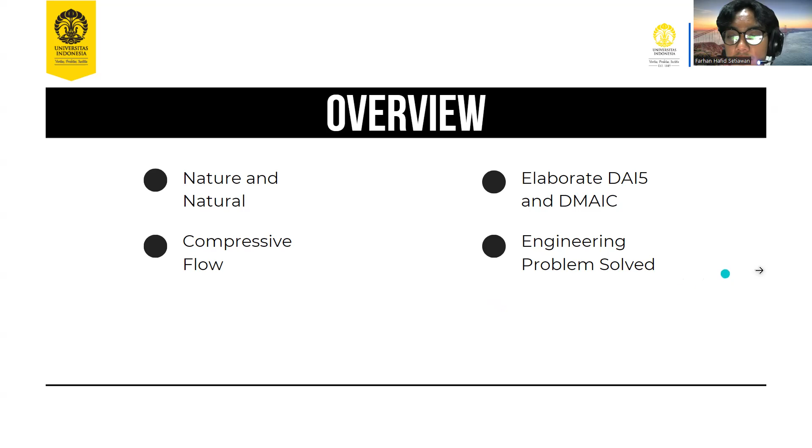First let's talk about nature and natural. What's the difference between these two? First, based on fluid mechanics, what is nature and natural? Nature in fluid dynamics refers to the laws and processes that govern the behavior of fluids. It encompasses the study of the flow of liquids and gases, including their properties, interactions, and transformations. It includes the study of phenomena such as turbulence, vortices, and laminar flows, which are crucial in understanding the behavior of fluids in different contexts.

Natural in fluid dynamics describes something that occurs or exists in nature without being created or caused by humans. This includes natural processes such as the flow of water through a riverbed or the movement of air through the atmosphere. It also includes the study of how fluids interact with their environment and how they are influenced by natural forces such as gravity and friction.

These are examples of nature and natural in fluid mechanics. First, CFD software is not natural because the fluids are simulated by computer and run by simulations, hence CFD software is artificial. Meanwhile, natural fluid is used to run things like wind turbines or water turbines that benefit from real wind or flow. A wind tunnel is also an example of an artificial machine that provides wind.

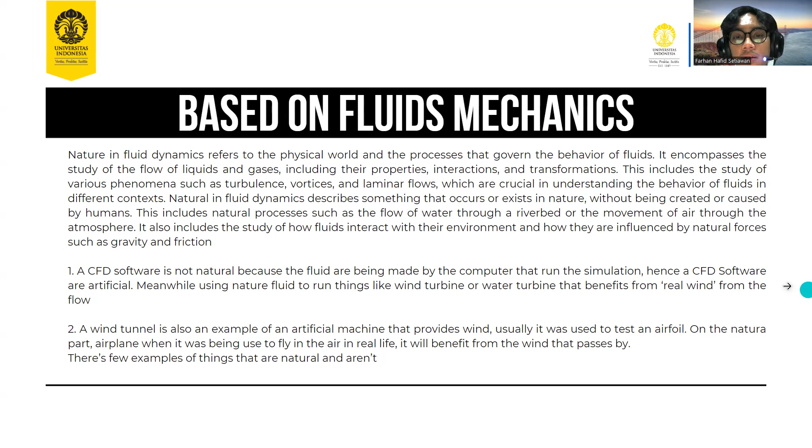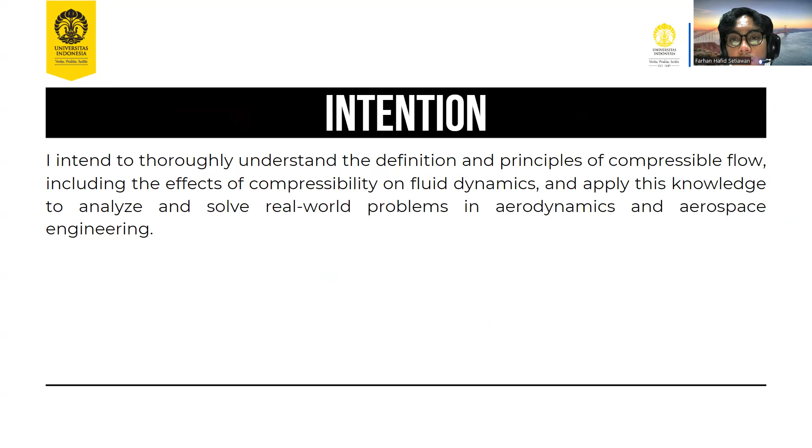Next, let's talk about compressible flow. My intention in understanding compressible flow is to truly understand the definitions and principles of compressible flow, including the effects of compressibility on fluid dynamics, and to apply this knowledge to analyze and solve real-world problems in aerodynamics and aerospace engineering. My initial thinking is that to begin analyzing compressible flow...

we first identify the properties of the fluid at the initial and final conditions. This involves determining whether the fluid is a gas or liquid and establishing its initial pressure, temperature, and velocity. Next, we categorize the flow as subsonic, transonic, supersonic, or hypersonic, and identify whether the flow is one-dimensional, two-dimensional, or three-dimensional. It's also crucial to note if the flow occurs through pipes, nozzles, diffusers, or other geometries.

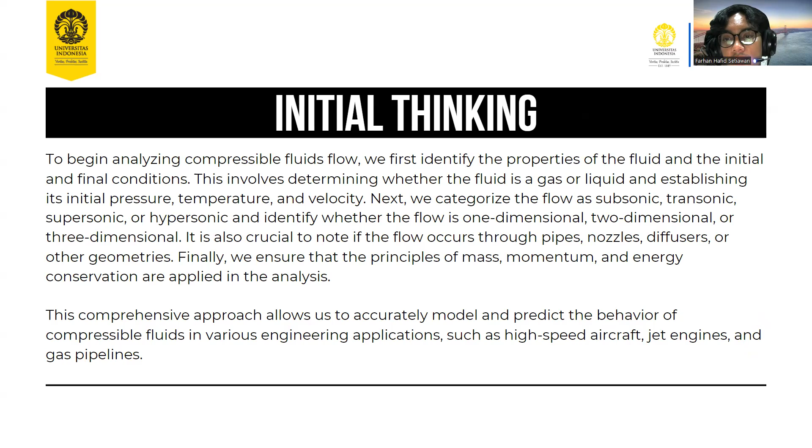Finally, we ensure that the principles of mass, momentum, and energy conservation are applied in the analysis. This comprehensive approach allows us to accurately model and predict the behavior of compressible fluids in various engineering applications, such as high-speed aircraft, jet engines, and gas pipelines.

The idealizations to begin analyzing compressible fluid flow: we first identify the properties of the fluid at initial and final conditions, involving whether the fluid is a gas or liquid, and its initial pressure, temperature, and velocity. Then we categorize the flow as subsonic, transonic, supersonic, or hypersonic, and identify whether the flow is one-dimensional, two-dimensional, or three-dimensional. Finally, we ensure that principles of mass, momentum, and energy conservation are applied in the analysis.

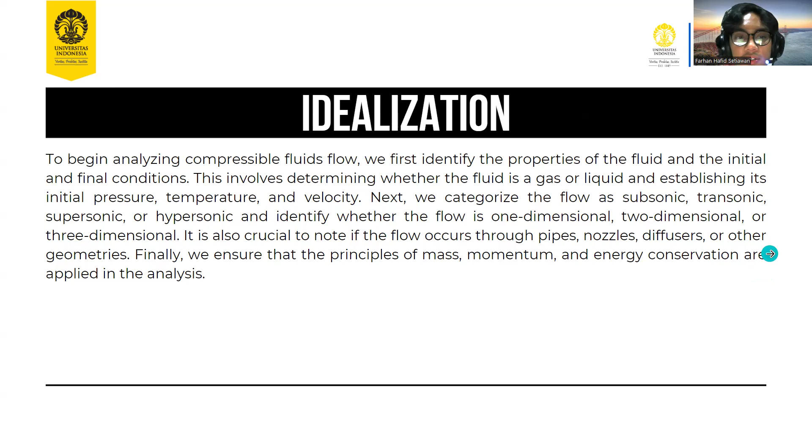To solve compressible flow, we utilize fundamental equations, ensuring mass conservation through the continuity equations. Momentum conservation is governed by the Navier-Stokes equations for compressible fluids, while energy conservation is described by the energy equations. Additional equations like the ideal gas law, the speed of sound, and the Mach number are essential. By idealizing the compressible flow as one-dimensional, isentropic, and frictionless, we can analyze flow behavior under various conditions, including changes in pressure, temperature, and velocity, to gain a deeper understanding of the fundamental principles governing compressible flow.

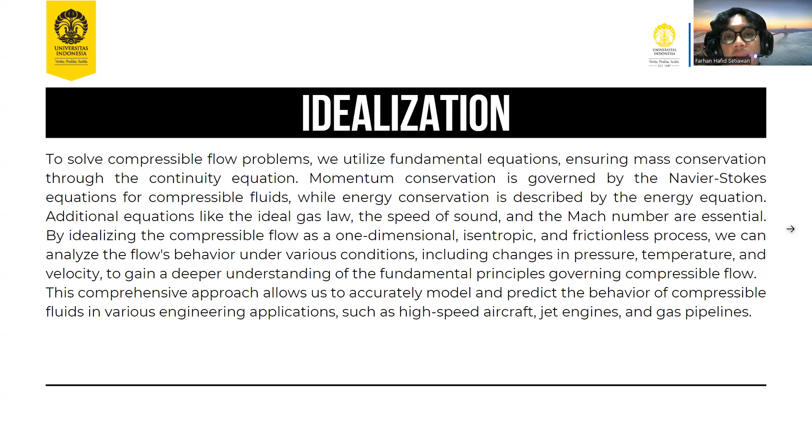This comprehensive approach allows us to accurately model and predict the behavior of compressible fluids in various engineering applications, such as high-speed aircraft, jet engines, and gas pipelines — the same as the initial thinking before.

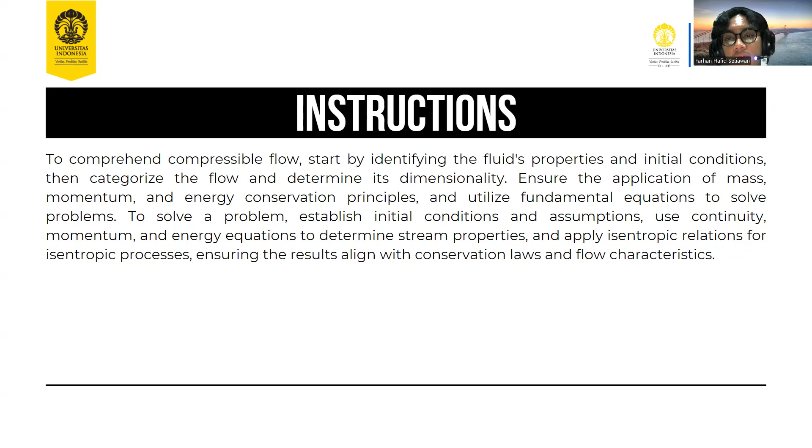The instruction to comprehend compressible flow: start by identifying the fluid's properties and initial conditions, then categorize the flow and determine its dimensionality. Ensure the application of mass, momentum, and energy conservation principles, and utilize fundamental equations to solve problems. To solve problems, establish initial conditions and assumptions, use continuity, momentum, and energy equations to determine stream properties, and apply isentropic relations for isentropic processes, ensuring the results align with conservation laws and flow characteristics.

For the third question in the quiz, elaborate the DAI5 and the DMAIC. First, I'll tell you about the DAI5 overview. First is conscious — ensuring oneself is conscious before solving problems. This means that before starting the problem-solving process, an individual must ensure they are conscious and ready to think clearly and effectively. Secondly is intention — having a clear and specific intention to solve the problem, so they can focus and think effectively.

The third is initial thinking, which means breaking down a problem into specific and detailed parts. In this process, an individual must break down the problem into smaller, more specific pieces so they can think more effectively.

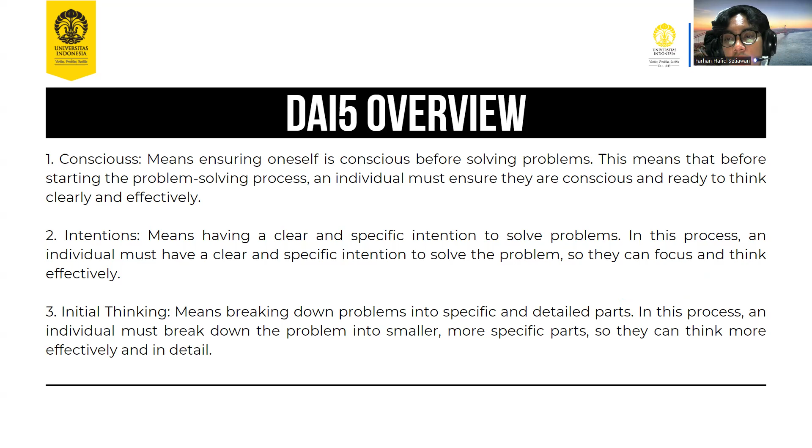The fourth is idealization, which means developing theoretical models and finding relevant formulas to solve problems. In this process, an individual must develop theoretical models relevant to the problem and find formulas relevant to solving it.

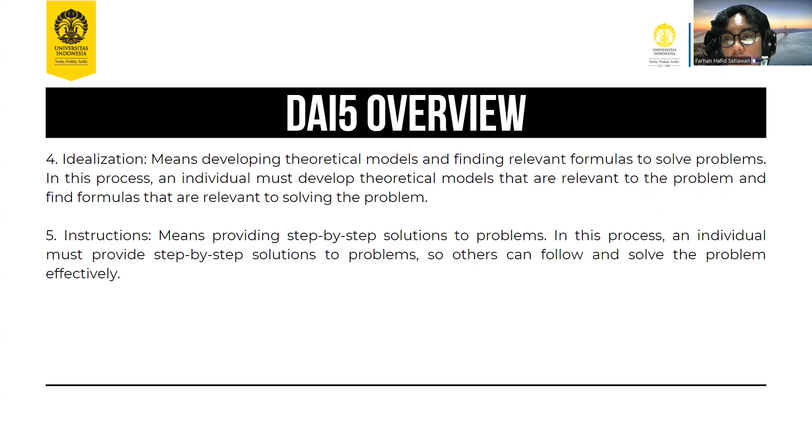Lastly is instructions, meaning providing a step-by-step solution to problems. In this process, an individual must provide a step-by-step solution so others can follow and solve the problem effectively.

Next, an overview of DMAIC. The definition part of DMAIC is to clearly define the problems, goals, and requirements. The steps involve identifying the specific issue, determining the objective, and outlining the necessary conditions for a successful solution.

Secondly is measure, which means quantifying the problem by gathering data and metrics. These steps involve collecting relevant information to understand the scope and impact of the problem, allowing for a more accurate assessment of the situation.

Third is analyze, which means identifying the root cause of the problem. These steps involve examining the data and information gathered to determine underlying reasons for the problem rather than just addressing its symptoms.

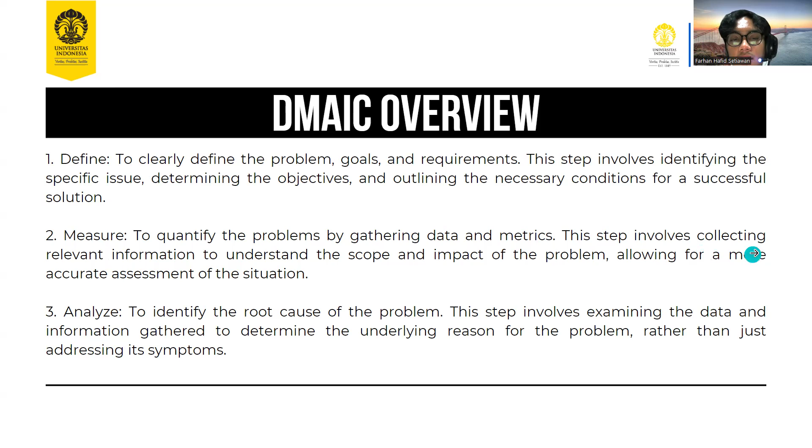Fourth is improve, meaning developing and implementing solutions to address the problem. These steps involve creating and implementing a plan to resolve the issue, often involving the development of new processes, procedures, and technologies.

Lastly is control, to ensure that the problem stays fixed and does not occur again. These steps involve monitoring and maintaining the solution to ensure that it remains effective and the problem does not return.

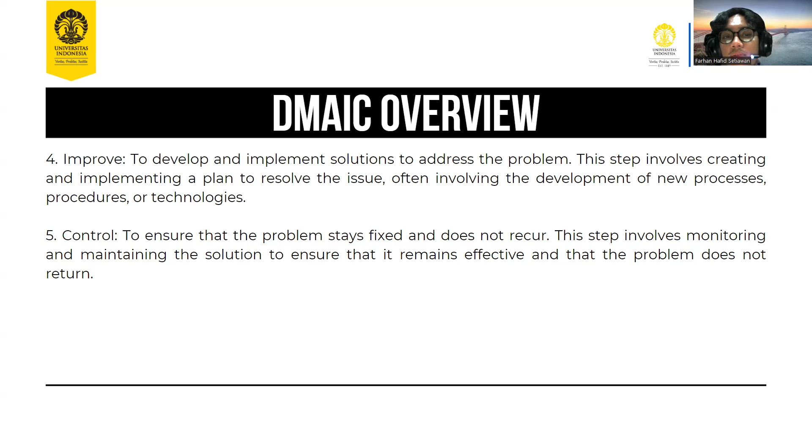Similarities between DMAIC and the 5-step method: both aim to understand, analyze, and solve problems methodically. Each step of both frameworks builds on the previous ones, creating a structured approach to problem solving.

Third, the initial thinking in the 5-step method parallels the define and measure phases in DMAIC, where the problem is understood and quantified. Lastly, the idealization in the 5-step method is similar to the analyze phase in DMAIC, focusing on understanding the root cause and formulating a theoretical method.

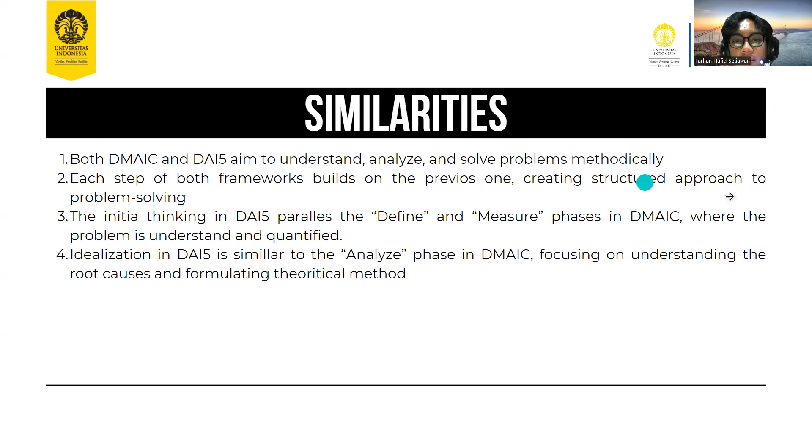Let's talk about differences. DMAIC includes a control phase to ensure long-term success, which is not explicitly detailed in the 5-step method but can be achieved through proper solution implementation and monitoring.

The 5-step method includes a consciousness and intention part which DMAIC doesn't have. This part ensures one stays conscious and always remembers God, being thankful to Him as the creator.

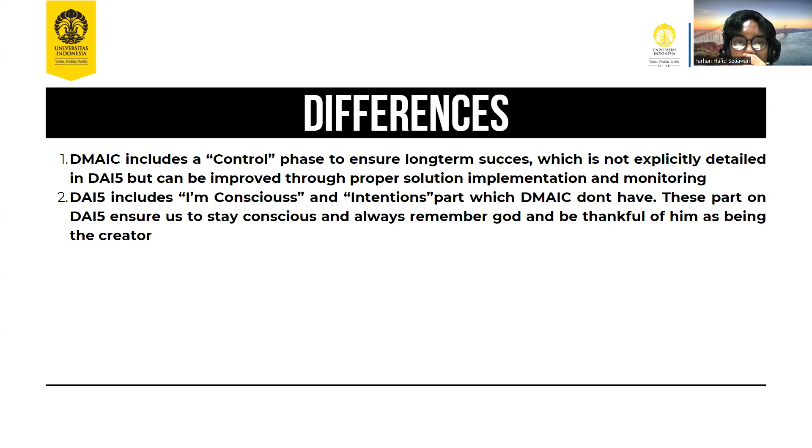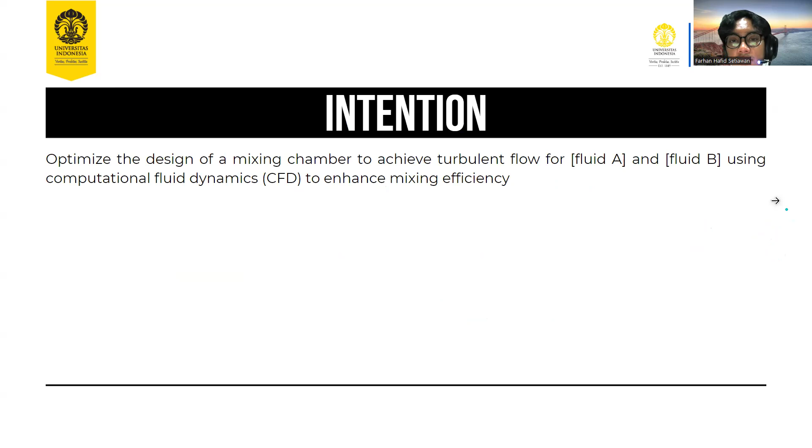Lastly, we're going to talk about an engineering problem to solve. This topic focuses on the transition from laminar flow to turbulent flow. My intention is to optimize the design of a mixing chamber to achieve turbulent flow for fluid A and fluid B using computational fluid dynamics (CFD) to enhance mixing efficiency.

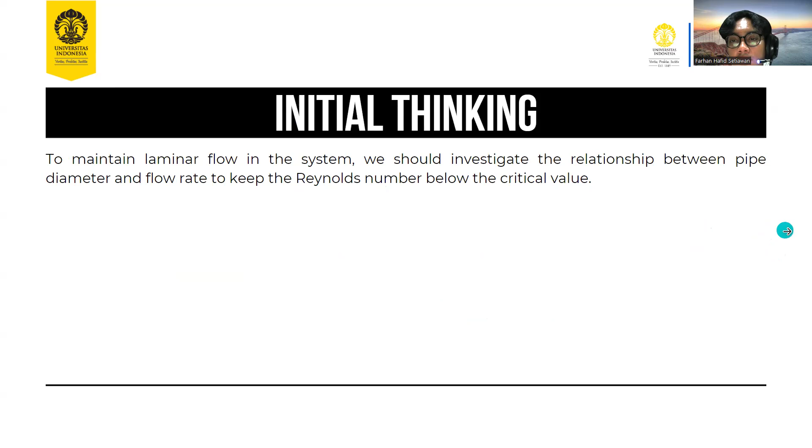My idealization is that in an ideal scenario, the fluid will exhibit a perfectly smooth laminar flow with minimal friction along the pipe walls, allowing for precise control and minimal energy loss. Laminar flow is characterized by smooth, layered fluid motion.

In contrast, turbulent flow is characterized by chaotic, irregular fluid motion with random fluctuations in velocity and pressure. The transition from laminar to turbulent flow depends on several factors, including fluid properties such as viscosity and density, and flow conditions such as velocity, pipe diameter, and surface roughness.

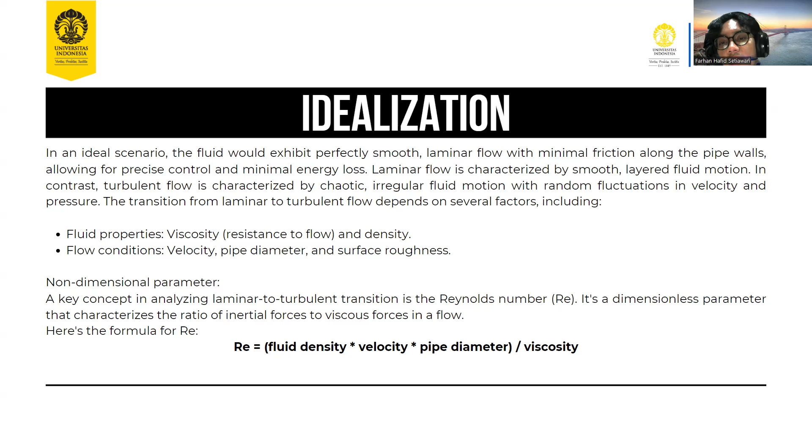A key non-dimensional parameter for analyzing laminar to turbulent transitions is the Reynolds number (Re), a dimensionless parameter that characterizes the ratio of inertial force to viscous force in a flow. The formula for RE is fluid density times velocity times pipe diameter, divided by viscosity.

The criteria for transition: the specific RE value at which transition occurs depends on the geometry and conditions. However, general benchmarks are used: flow is typically laminar under RE 2000, typically turbulent above RE 4000, and between 2000 and 4000 is a transition zone where laminar or turbulent flow might occur.